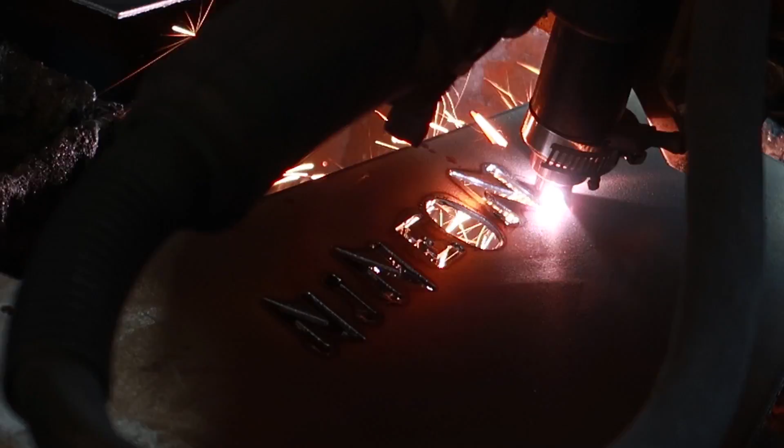Alright guys, what's going on? So I'm starting off the video at HRT, that's a local shop that I work at.

Today we're actually gonna get back on the chassis. As you guys know, I recently put the rear axle on and kind of mocked everything up, put the four links together and stuff like that.

In order to get the truck as low as I want it, because I'm gonna autocross the truck - a lot of you guys are asking me what I'm actually trying to do with it - I'm trying to make it a road racing, autocross truck, so it's gotta be very low but still functional, but I'm not doing something like bags or anything.

So we gotta step the frame up. As you watched previously, I recently lowered my truck and did a simple C-notch, where I took a 5-inch pipe, cut it in half, and just put it in the frame.

This time we're gonna bring the frame height up entirely. The way we're gonna do that is we're actually gonna cut out plates and weld them directly to the frame. What we got going on over here is I went ahead and sketched out a template.

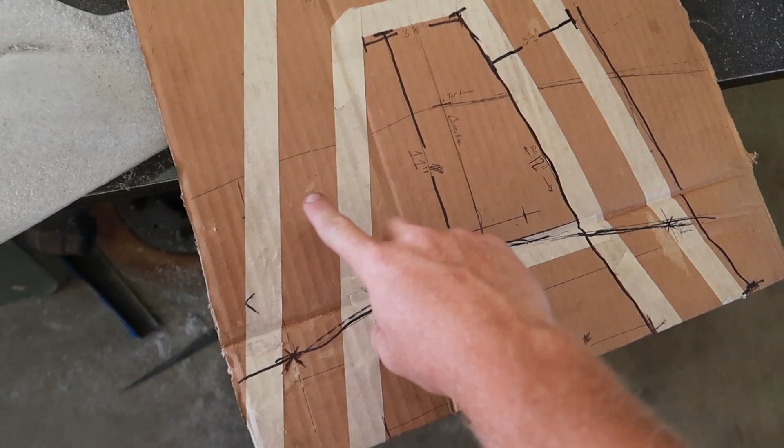So pretty much this is like the top of the frame. I'll bring this up to the chassis and show you guys later. This is like the bottom of the frame, and this is roughly the top of the frame. There's a bunch of dimensions, and I'll put the image up so you guys can see it later if you're actually looking to do this.

We did something very similar to this. Basically, this is roughly where the axle is gonna sit. The axle tube is about 3 3/8 for the 8.8 roughly, but we're just gonna do like 3 1/2 all the way up.

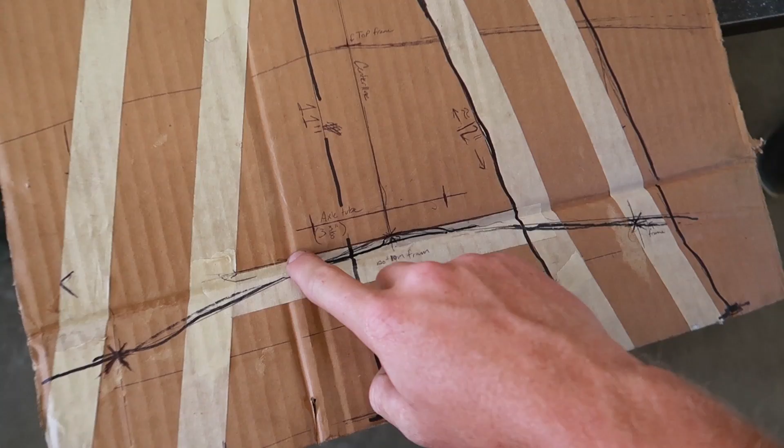Previously on the old frame, I went ahead and just took the pipe and put it right here - this is the bottom of the frame and the top of the frame, a simple pipe. But I believe the axle, or where my ride height's gonna be, the top of the axle is gonna be roughly where this line is.

So if the C-notch only goes to here, it only gives me a few inches of travel. So we're gonna pull the whole frame up. The way we did that was we cut this - this template is almost the same as this, but we put it on the computer and sketched it out.

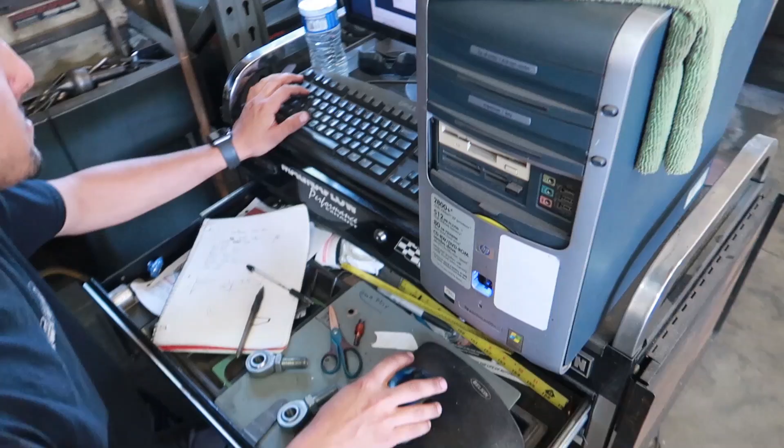Explain what's going on here on the plasma table for people that don't understand what you're doing. Basically, we took his drawing, took all the dimensions off of it, and pretty much just copied it onto the computer and made it to the dimensions he wanted so he'd be able to drop his truck enough to get the right height.

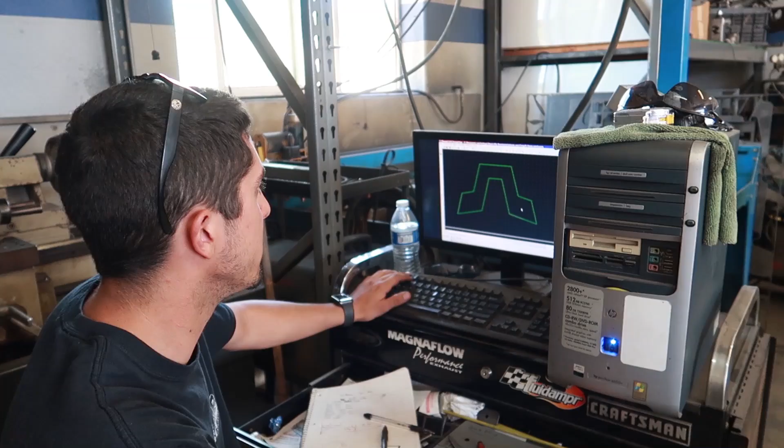And then we just added some support out here to go onto the frame, so it's strong enough that it wasn't just frame to material. Basically now it's got some overlap in it, and we're gonna add some pieces in here so we'll be able to weld this directly onto the frame right in this area and make it stronger.

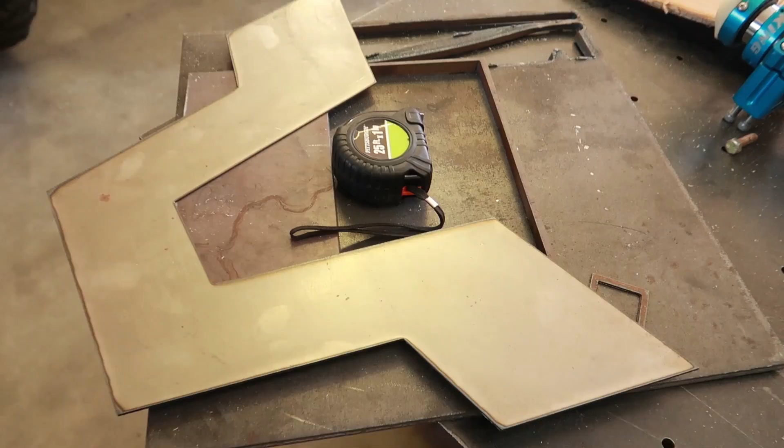Yeah, so these little pieces you can notice are not on my little sketch - these are what you'd typically see. Basically the frame will be cut roughly straight up and down like I had it, but this piece we're overlapping under the frame, so it's not a butt weld, it's a lap weld.

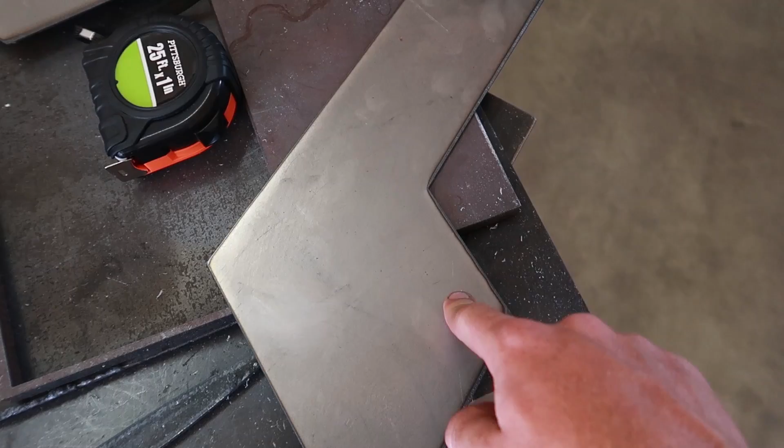It'll give it a little more structural support, and we'll probably also end up doing a hole in here so we can weld directly to the frame. But we just cut out this one piece, so I can go ahead and take this directly up to my chassis and kind of mock it up.

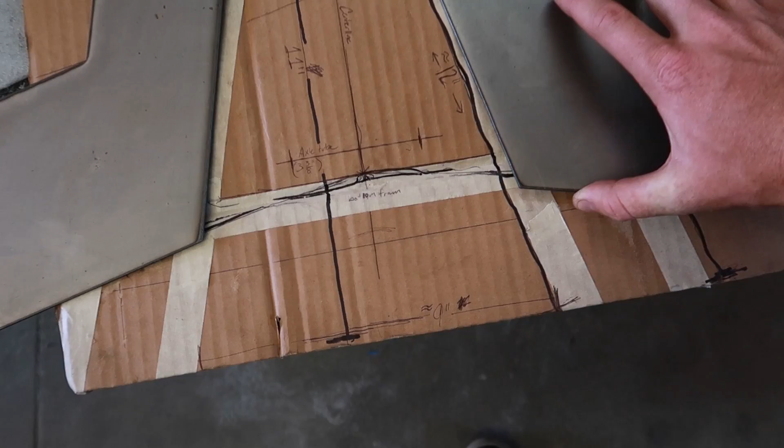You can actually see that looks pretty much perfect in terms of dimensions, which is good. So I can take this piece and lay it up to the frame, see where it fits, and go from there. I can raise or lower it and see exactly what dimensions I need for these adder tabs, so we can put little holes in it and all sorts of fancy designs and really see where I want it.

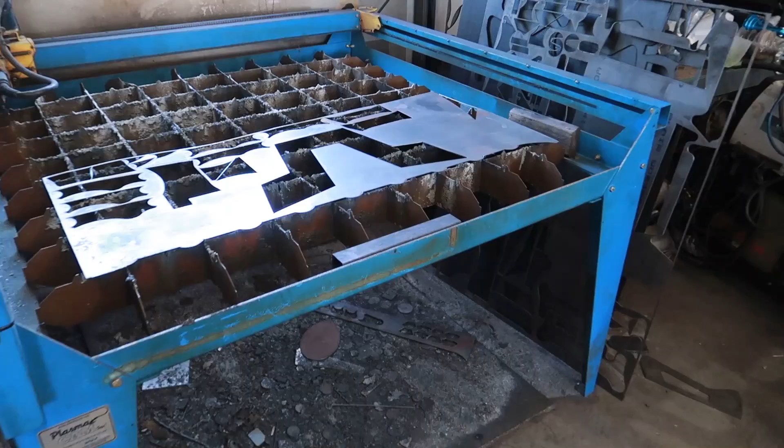So yeah, as you can see, I just cut that out on the table, and I'll go ahead and insert the clips of when this thing was getting cut out, because it's pretty cool. If you've never seen a plasma table work before, it's kind of interesting.

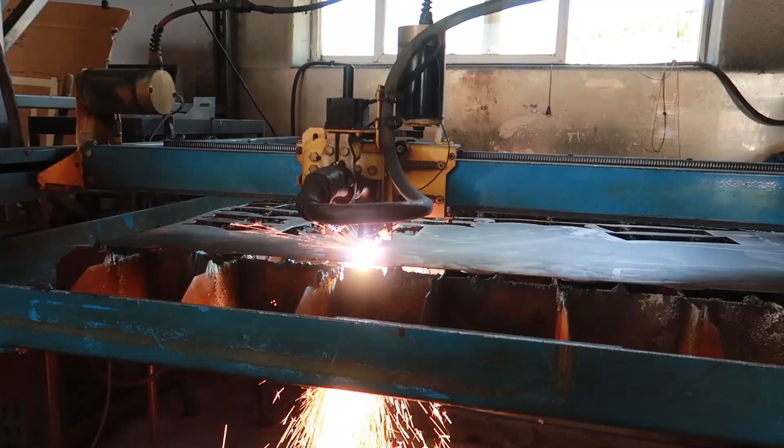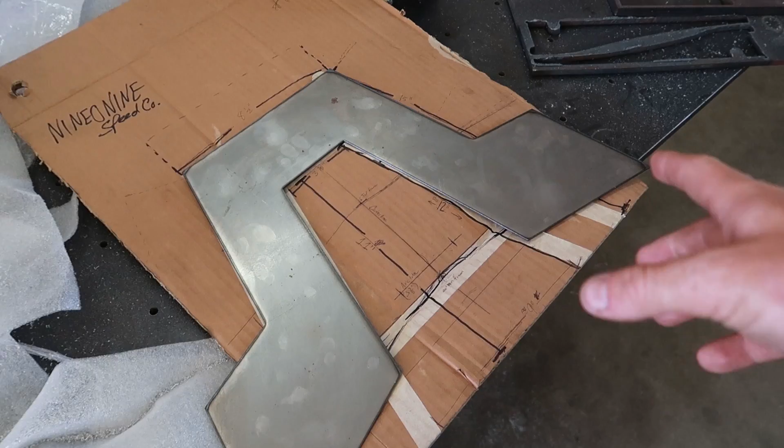Alright guys, so we've got the plate kind of cut out, so I'm going to take this up to the chassis and mock it up, see what changes we need to make. We're going to draw that in here, put some holes in it, and get this thing mocked up. So I'm going to put it up to the frame and see what it looks like.

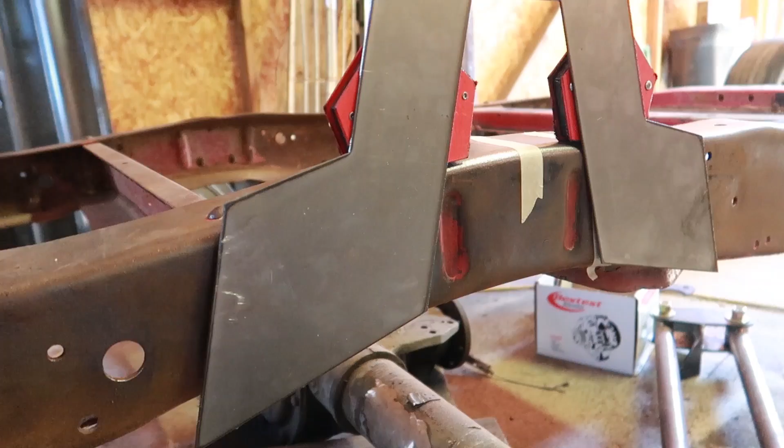Alright, here's our first initial test fit. As you can see, it's actually not bad. I was worried these angles were going to be too intense, but they're not. You can see this one's right at the bottom of the frame. This one hangs down a little bit, which is fine, I can always cut it.

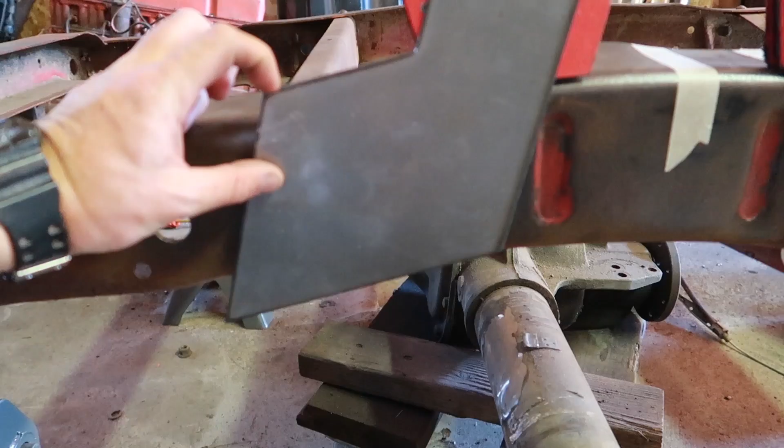But I think since we're here now, I'll be able to go and take some photos with some tape measures. I think we'll bring this down a little further, take a good 2 inches out of the top here, and then about 1 inch off the bottom. That'll probably be good, because I don't think the step notch needs to be quite this high.

Going back to my drawing, the bottom of the frame's right here. I believe the axle is going to sit right about at this line. So if I really wanted it, and this was literally something I just trailered to shows and never drove, and I was one of those losers, I would just put another C-notch in it, because then the axle would only need about 3 inches to drive.

Since I plan on beating the living crap out of my truck, as I always do, because that's what you're supposed to do when you drive an old car, I'm going to bring the frame up. But as you can see, above the frame there's only about 3 inches there. It's a lot more than 3 inches right over there, so we probably don't need quite that much material. We're probably going to shorten it just a hair.

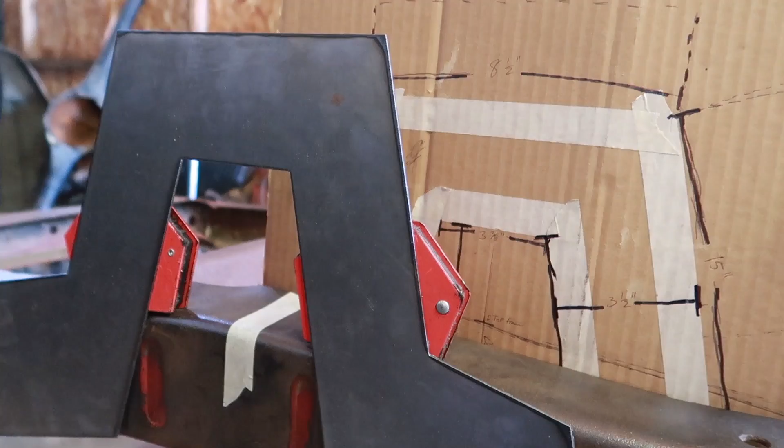If you look at this, if I hold it up next to it, you'll kind of see what I'm talking about. That one's just a little bit taller, roughly at the bottom of the frame, so we've got a couple inches to spare. So I'll probably make this thing a little bit shorter because it doesn't quite need to be that high, because I'm not putting on bags. For all you guys that want me to bag my truck, I'm not bagging my truck.

I'm sorry, guys. So I think I'm going to take a couple inches out of this and mock it up again, where I want the notch to sit. I'll talk to you guys about that in just a second, but I do like how this looks. You can see just from there to here, it's going to be pretty cool. So we're going to have my logo in here and a bunch of holes.

And I realized there's a rivet right here for this cross member, you can see it down there. So we'll probably end up doing a hole right here so the plate can go on top of that rivet, and then we'll weld around it so it'll be super, super rigid.

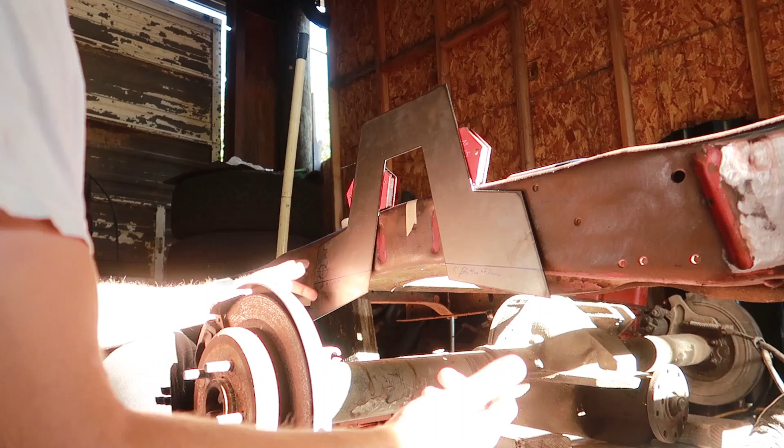Alright, so what I'm doing now is, I don't know how much you guys can see, I hope you can see some of this, the lighting's really bad in here. So I marked where the bottom of the frame is on both sides so we can cut that off because we're not going to need it. And I slid the whole thing down, so this gap is now smaller.

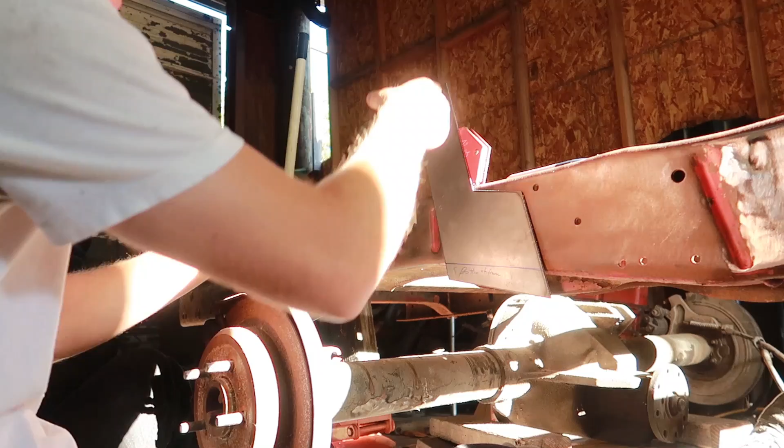The gap between the notch and the frame is now exactly 3 and a quarter inches, so that'll give me something to go off of later. The gap between the top of the frame and the bottom of the notch is 3 and a quarter, and from the bottom of the frame to the top of the notch is exactly 7 and a half. That's a good measurement, nice even numbers, something I can go off of and transfer to the other side very easily. It seems like that's a good ride height.

I have a good feeling the axle's probably gonna sit maybe right around here, maybe 1/3 of the way up the frame at ride height. So if my axle's roughly there, that still gives me over 6 inches of travel for the axle. That's still really good.

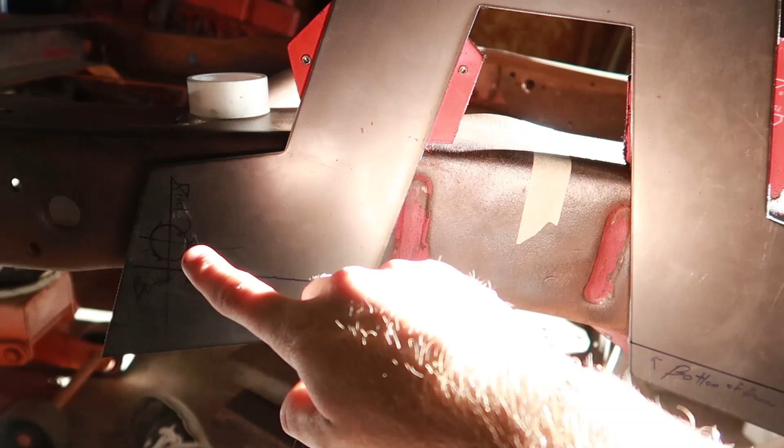So there you can see, and there's also a rivet right here like I showed earlier. I marked that out where I need to drill a hole to clear that rivet, so we'll be able to put that there.

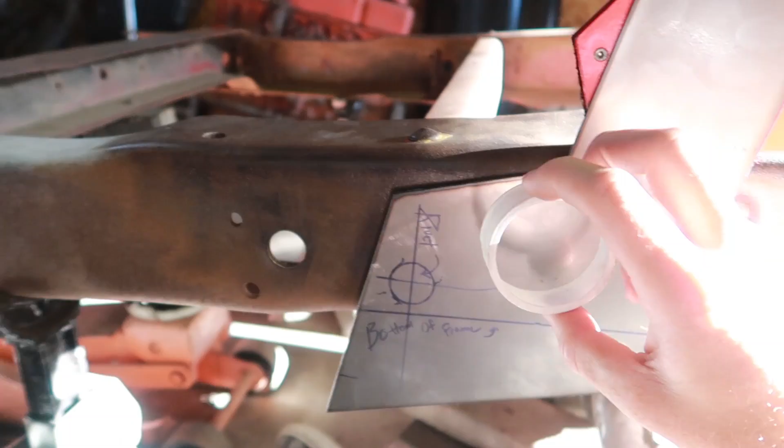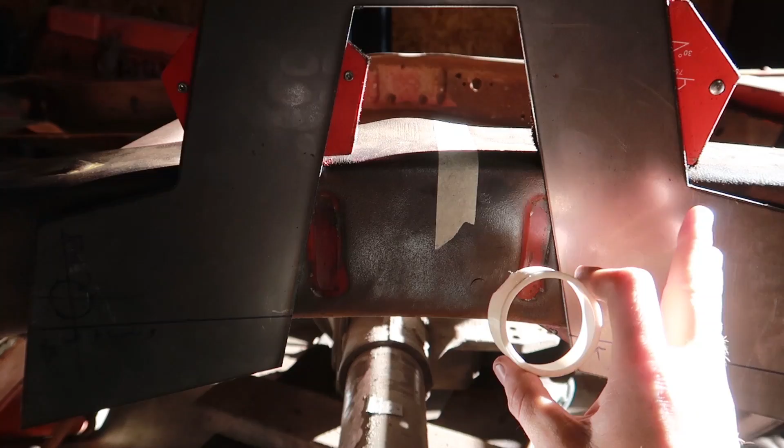This is a Teflon tape kind of cover thing, whatever you want to call it. What I'll do is put this on the frame like that, cut that hole out, and do another one probably right here, and another one here, maybe something like that. I don't know, we'll figure it out, trying to make it somewhat symmetrical.

That's where we'll run a tube through to the other plate on the back side. We're going to connect them with tubes, and the cool thing is once you drill this out through the frame, they'll be hollow so you'll actually be able to see through it, but it's stronger than just boxing it in. It'll have a tube inside of it too, another axis of strength.

So I'm going to go ahead and measure out where I want this thing to sit, do some final measurements, and come back with my last thoughts and actually get this thing cut out on a table.

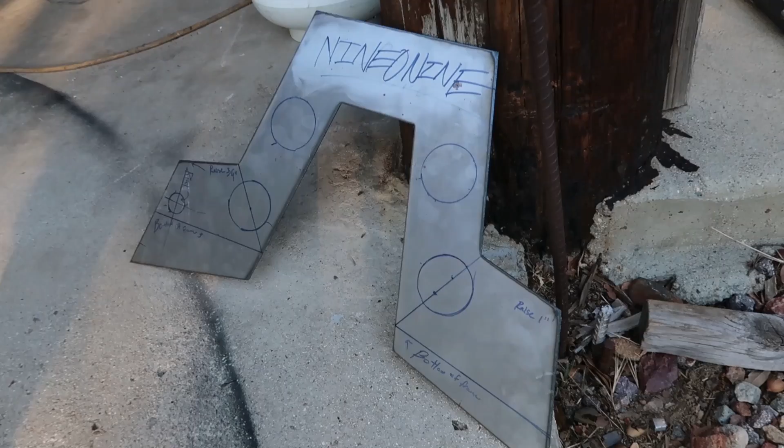Okay, so there's the actual template. These are, like I said, I took the Teflon. That's a 2-inch hole right here, and I just put one there. You would probably put one here and here as well.

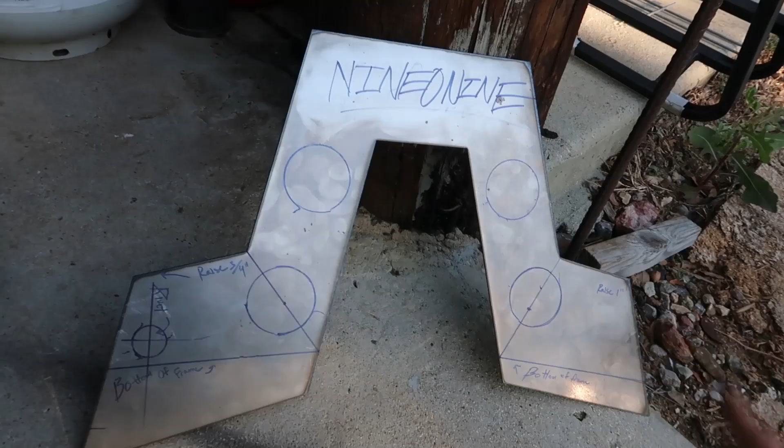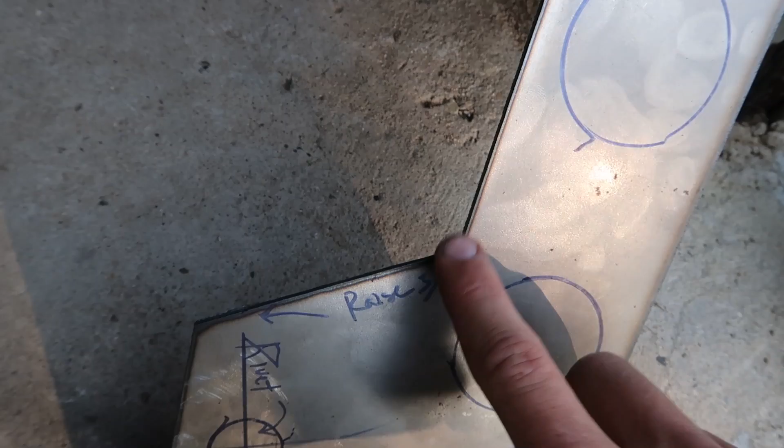That's a really big thing I want to point out. But yeah, bottom of the frame, everything's all sketched out. We just got to raise this little corner up 1 inch. This piece is fine, and same with this one, we got to raise this up 3/4 of an inch, but this corner here is fine. So we're pretty much just going to pivot this up a little bit and then just cut the bottom here, and we should have a pretty good piece, and this will work on both sides. It'll sit perfectly flush with the frame, and I can weld around the whole thing.

Like I said, I'll have tubes coming through this, so you'll see a weld here to a tube, and it'll go all the way through the frame. So it'll be pretty cool.

All right, but anyways, pretty tired. Did a lot today, got a lot done. I like the measurements that are there, everything seems to fit really well. So I should be able to take this.

We'll put it back in the computer with HRT with Brandon, go ahead and sketch it out a little bit different, with all the modifications I just made, so I know it'll fit perfectly flush with the frame. And I'll go ahead and we'll actually make it out of 3/16. You notice that metal is kind of thin, it is just a template, so we'll make it out of actually 3/16 or 1/8 inch steel.

Put those holes in it and actually get the pipe and get every little bit that we can actually weld together, make our own kit really. So we're gonna kind of dimension everything out, I'm gonna build it on SolidWorks tonight. That is a CAD file that I know how to use, so if you guys are engineers you know what I'm talking about. I'm gonna sketch it up on CAD, make a 3D model of it, bring it in tomorrow, and we should be able to get this thing done. So I'm gonna catch up with you guys when we're back at HRT, get this thing cut out.

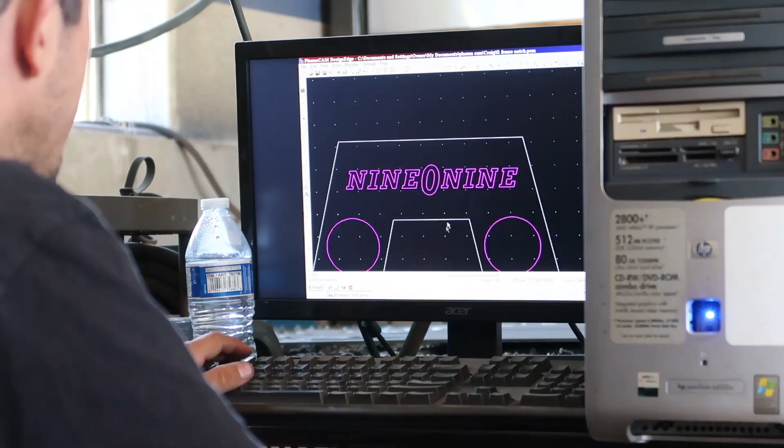Haters gonna hate. All right, we're back at HRT, and I got my glasses on. I'm ready to do some cutting, and we're gonna cut out the tabs.

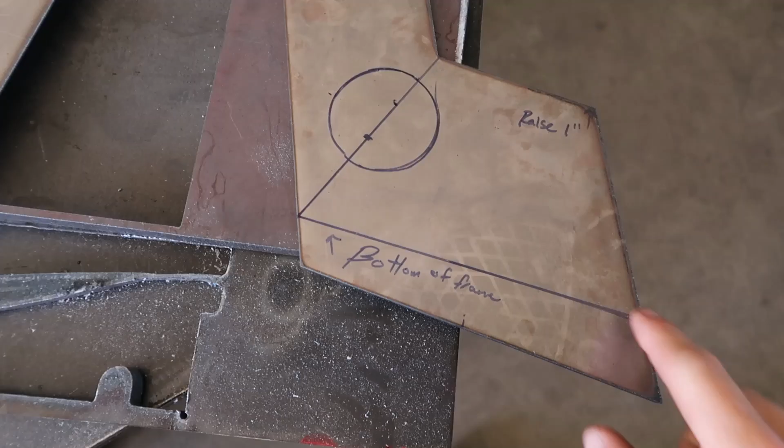Pretty much, I can't see anything, but this is the piece. As I showed you guys yesterday, we cut off the bottom and added a little bit to the top, and then made a drawing on it. I'm filming this on 23 frames a second, sorry, I just realized that. So there, you can see we're getting it cut out on the table. We'll actually show you once it cuts out, but just kind of adjusting the table to make sure it cuts out in the right spot.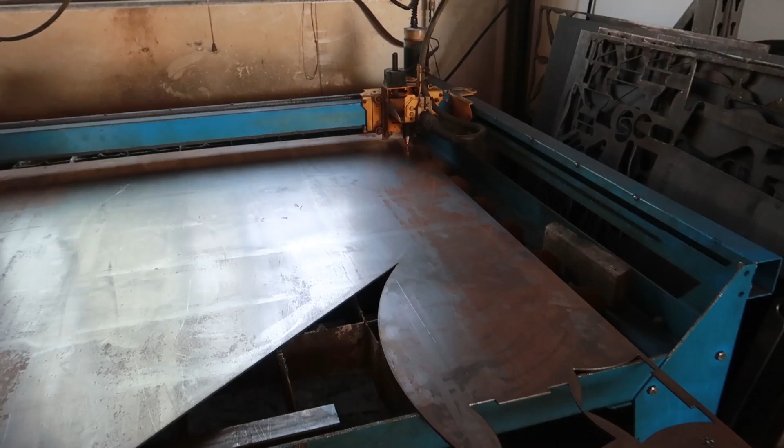And then we're gonna get some new box and end plates made. I found your glasses for your big ass head. Those are freaking, oh, put a big old piece of blue tape right here. Yeah, there you go, ready to rock and roll. You guys thought it was just for the intro. I'm wearing these.

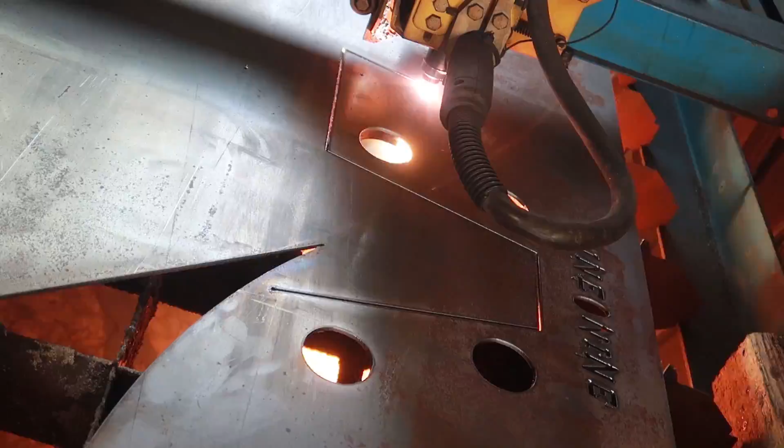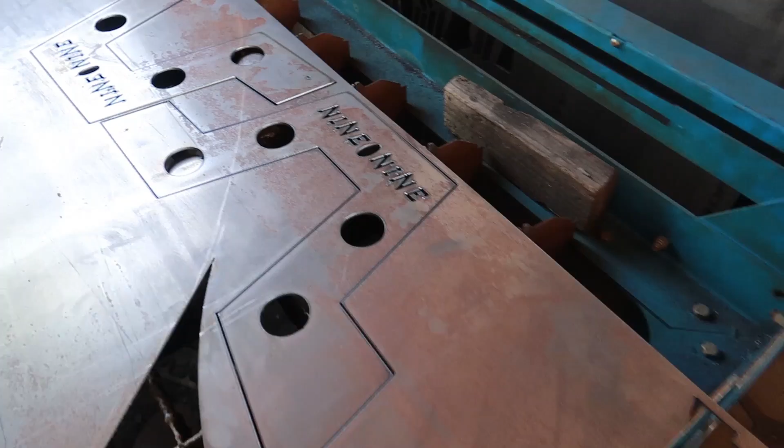All right, so you can see there's the tabs, or not tabs, the actual plates are all done. Looks like it came out pretty good. It's pretty fancy.

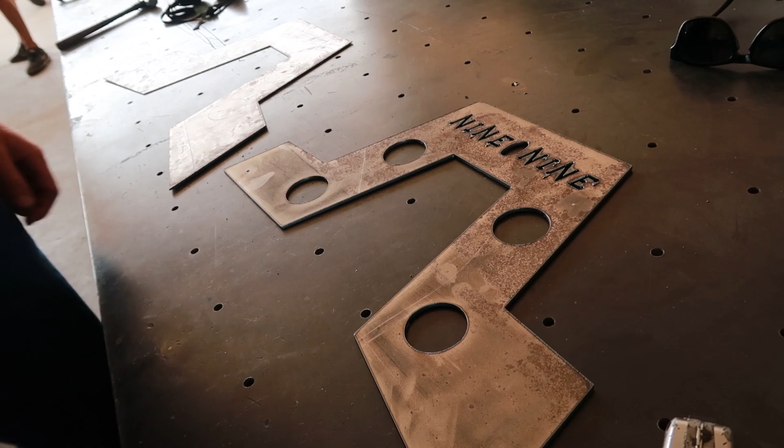All right, so here's the old one, this is our template. Here's our new one. As you can see, it's a little bit shallower on the bottom, and a little bit higher on the top. So if I put this over this one, bam, look at that. It comes up a little bit further on this corner, just so it's a little bit more level with the frame. And then it's a perfect line right on the bottom of the frame. You can see bottom of frame, and it's a perfect line right there. That ain't bad though, looks pretty cool, pretty fancy.

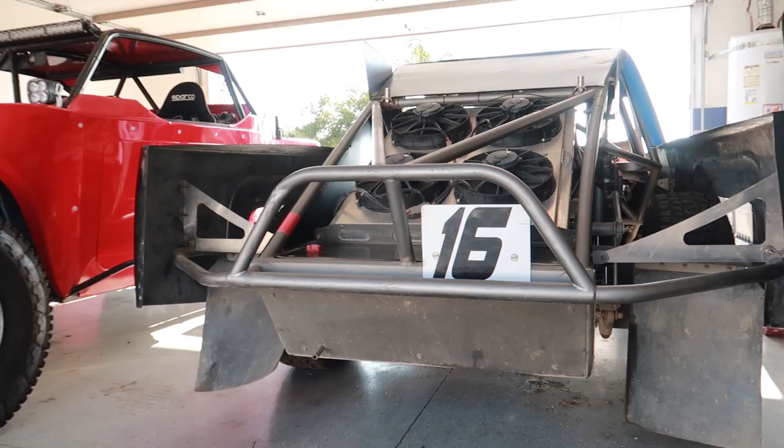I mean, I could just stand on the side as always. Yeah, that's what both of them. Yeah, I haven't really shown this yet. So this is your guys' Pro Light, strapped to it.

Hey, you're on fire! I know, you're on fire. Burning some header wrap.

So in case you're wondering, that's what a Pro Light does, except on a dirt track.